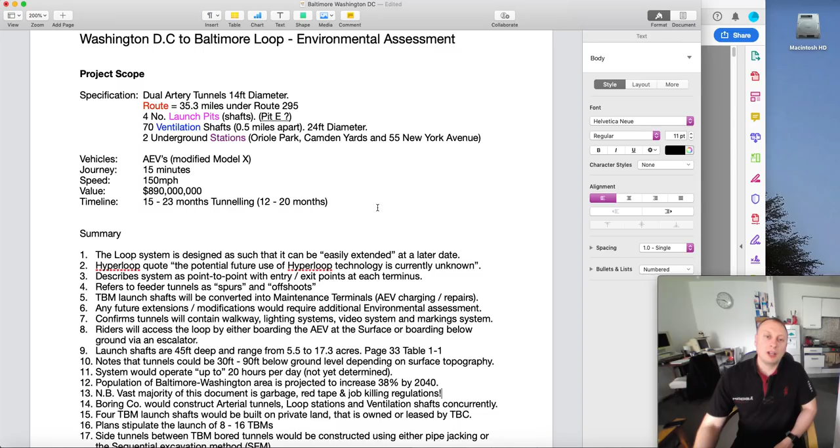They give some very, very wide timelines in terms of constructing various parts of this project. So the actual entire project, they have taken 15 to 23 months, which is near enough 50% difference between 15 months and 23. There's a wide margin there. And they say the actual tunnelling element could be anything from 12 to 20 months.

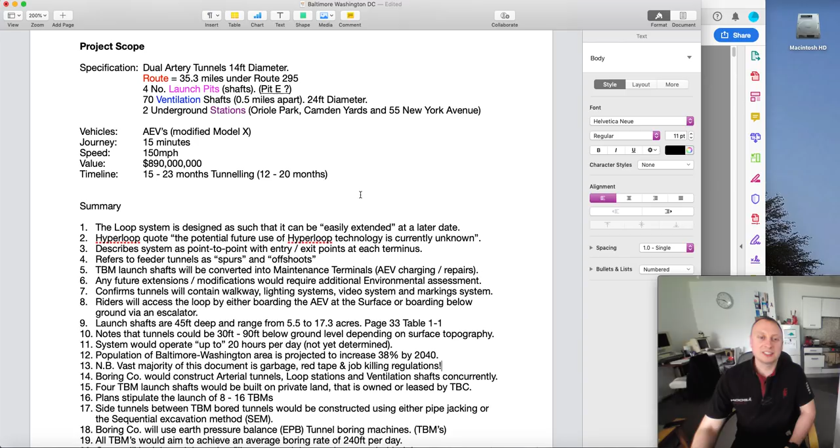They also mention using lots and lots of different TBMs, 8 to 16 TBMs. Again, there's a lot of difference there. Well, why do you need 16 TBMs? Why not 8? Anyway, let's get into the details. Like I keep saying, there's a lot of rubbish in this document. Some very, very strange kind of regulations and specific things that it asks of you. But I'm guessing that's how you guys do it in the USA.

There's even one part asking about how this might impact ethnic minorities or people of low income, and I find that a very strange thing to single out ethnic minorities like that, when really we should be looking at how it affects anyone, from people who are on low incomes to people who are multimillionaires. It shouldn't really matter. If it's going to affect you to the detriment of your health or your well-being, then that should be considered. It shouldn't really matter if you're black, Chinese, Korean, Pacific Islander, European. It shouldn't really matter at all.

Anyway, the loop system is designed such that it can be easily extended at a later date. They plan to add more stations in between Washington and Baltimore, which I will point out later on. But this actual environmental draft report does not take into consideration adding extra micro stations along the route. That will be considered in a separate report.

They talk about the Hyperloop, but it's not really anything to do with potentially converting it. They say the potential future use of Hyperloop technology is currently unknown, basically saying, well, we don't really think it's going to be used for Hyperloop, which I was quite surprised to read. They describe the system as point-to-point with entry/exit points at each terminus. There are only 2 terminuses, one in Baltimore near the main stadiums there, and one in Washington. Refers to feeder tunnels as spurs and offshoots.

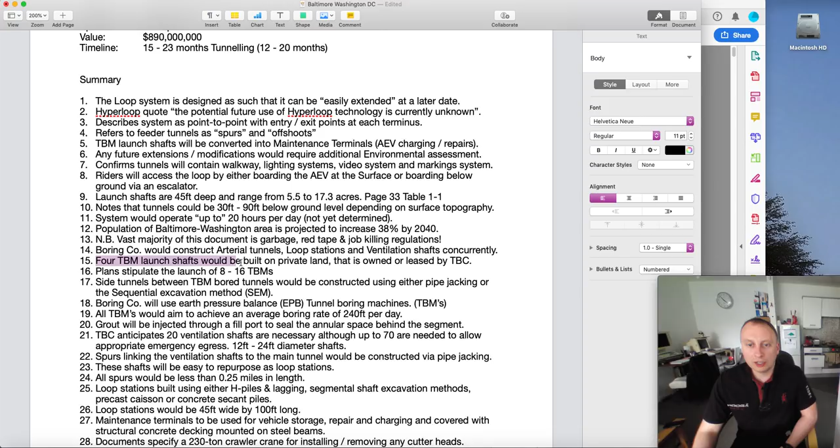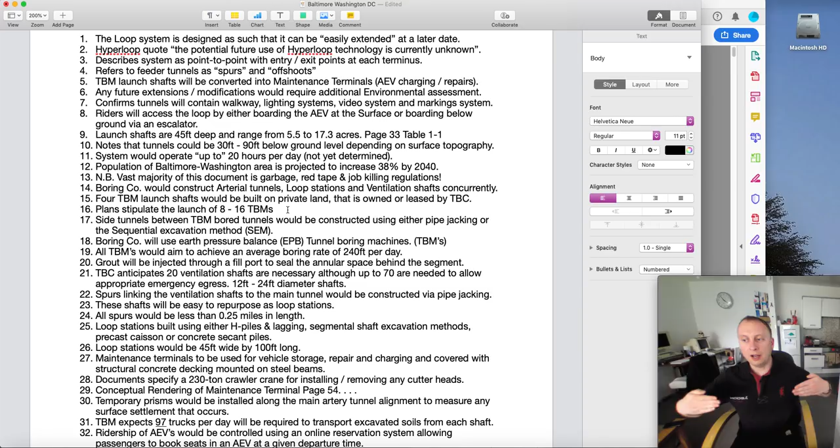4 TBM launch shafts will be built on private land that is owned or leased by the Boring Company. Plans stipulate the launch of 8 to 16 TBMs. If they did 16 TBMs, and this is quite a big issue, they would then have to extract the cutter head from the ventilation shafts, because you'd have 2 TBMs essentially working their way towards each other, and they would meet at the actual ventilation shaft, at which point both cutter heads would be removed and the machines would be taken apart and disassembled. So I'm unsure about that, but it might be better just to do a TBM from one launch pit to another launch pit, and then it's a lot less work trying to extract that cutter head.

Side tunnels between TBM bored tunnels will be constructed either using pipe jacking or sequential excavation method. Sequential excavation method, from what I've read about it and basically my experience, is going to take a lot longer. To build side tunnels, it might be easier to use pipe jacking, and as you know, I do like pipe jacking. Boring Co will use earth pressure balanced tunnel boring machines, which we kind of thought all along, but it kind of just confirms it there.

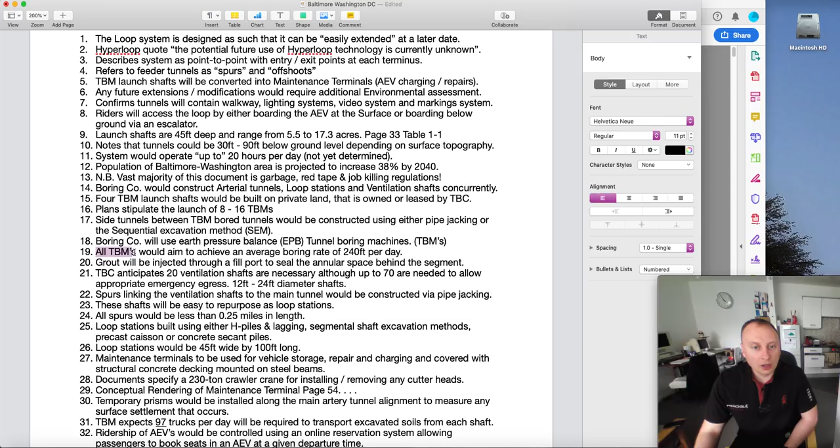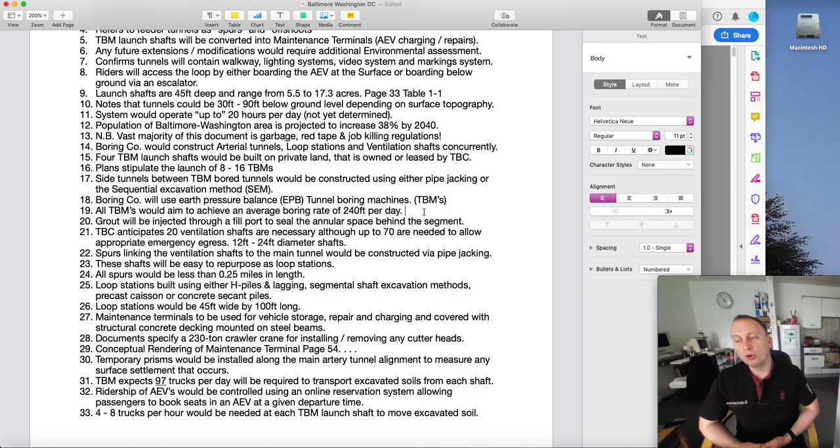All TBMs would aim to achieve an average boring rate, and this is one of the revelations of this document, of 240 foot per day, which is exactly 10 foot per hour if they're operating 24 hours a day, although it might be that they do 24 foot in this hour and then they have an hour where they're basically loading up the machine and removing the spoil. So it will average 240 foot per day, which is not bad going, really, not bad at all. And that's probably an underestimate of what they actually think they can achieve. I think they're kind of sandbagging that number. I think it'll be nearer to 300, maybe even 350.

Grout will be injected through a fill port to seal the annular space behind the segment, and obviously they're going underneath the motorway. What you want to do is seal that space so that you don't get any subsidence in the land above the tunnel.

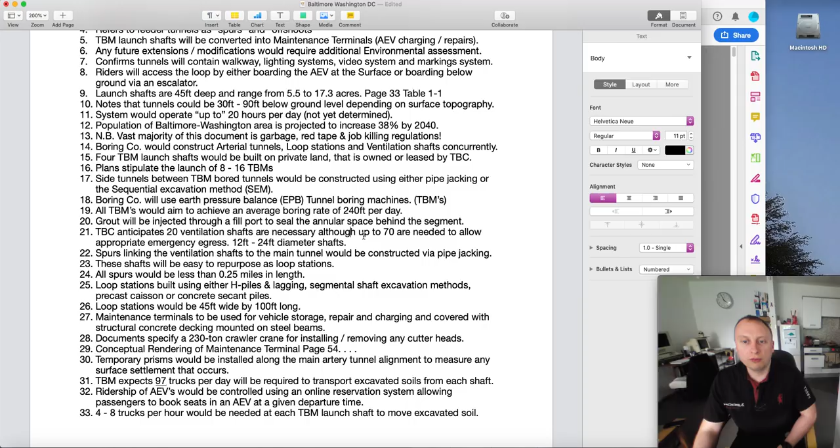The Boring Company anticipates 20 ventilation shafts are necessary, although up to 70 are needed to allow appropriate emergency egress. The actual shafts will be 12 to 24 foot in diameter. Spurs linking the ventilation shafts to the main tunnel will be constructed via pipe jacking, and obviously the sequential excavation method.

Loop stations, they actually give a firm dimension on the actual size of the loop stations, and they said it's going to be 45 foot wide by 100 foot long, and I think it was also 45 foot deep. Maintenance terminals to be used for vehicle storage, repair and charging.

So the actual TBM launch pits would be turned into these maintenance terminals. They actually build 2 separate floors, and then they'd have all the equipment and all the storage area built into that space. So maintenance terminals to be used for vehicle storage, repair and charging, and covered with a structural concrete decking mounted on top of steel beams, also known as concrete planks. We like to call them concrete planks here in the UK, but it's basically the same thing.

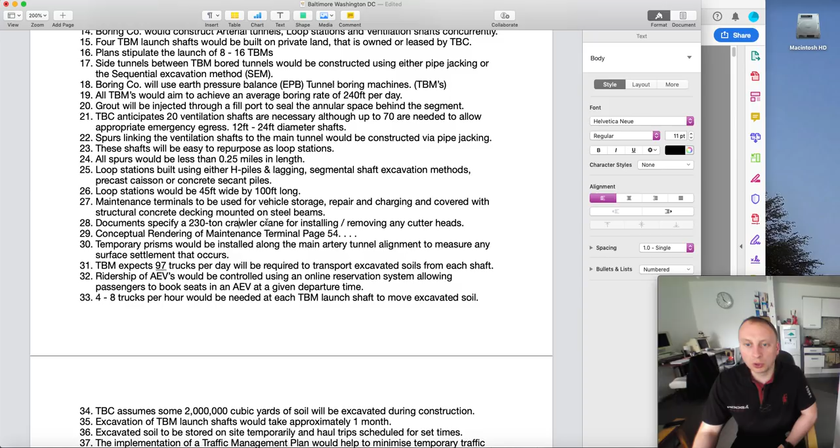Documents specify a 230 ton crawler crane for installing and removing any cutter heads, which seems reasonable. I would imagine that getting one of those might be a little bit tricky, but it's doable. There won't be that many, I'd imagine. But then again, it is the USA. There might be tons of them. I imagine the UK would be difficult to get one of that particular size.

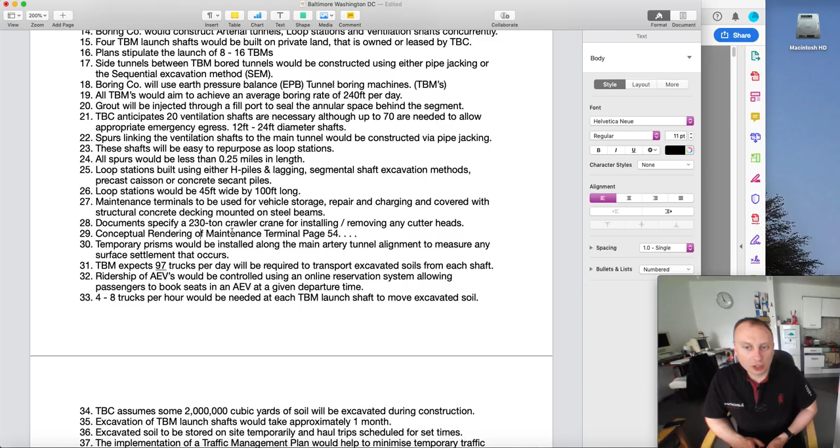Conceptual rendering of maintenance terminal is on page 54. We'll have a look at that in a minute.

Temporary prisms will be installed along the main artery tunnel alignment to measure any surface settlement that occurs. So these prisms will be mounted, say, every 10 foot or so. And then you'll have a system that is mounted on top of either a lamppost or maybe on the side of a building, and it'll be shooting out its measurements to that particular prism every 5 or 6 seconds, maybe 10 seconds, and if there's any kind of movement, even if it's a millimetre, it'll notice it and it'll be able to notify the people running the project.

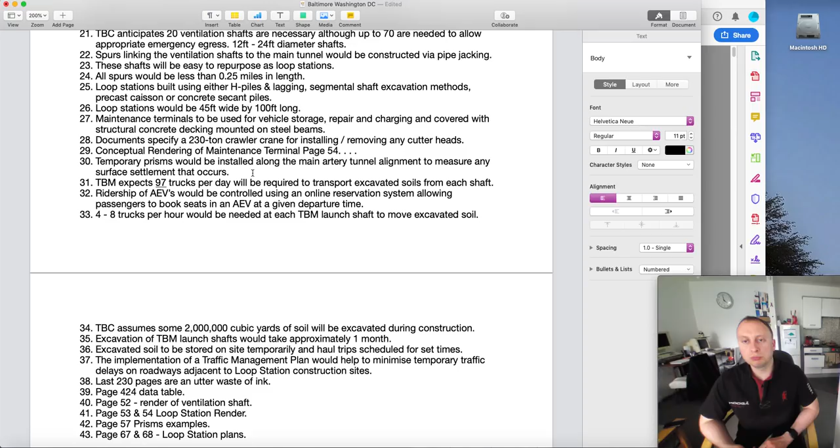If the movement is more than, say, 5 or 6 millimeters over a short period of time, say 10 minutes, it will immediately notify everyone involved in the project and instruct the TBM to stop work, which is the common sense thing to do, because obviously something has gone badly wrong. Potentially they've hit an area of land that is full of voids, or potentially has been fractured, or maybe they've hit an area where the water table is higher than in the rest of the route, and obviously they need to stop the TBM and rectify that as soon as possible.

The TBC expects, this is quite an important fact, 97 trucks per day will be required to transport excavated soil from each shaft. 97 trucks per day is a lot of trucks, so we're talking big diesel trucks. And they actually put a plan in the environmental draft report, and some of these routes are quite considerable for the actual trucks to dispose of this spoil. So the actual carbon footprint of these trucks operating every day for 12 to 24 months is going to be quite considerable.

That is potentially an issue, and they need to think about how they can minimise the carbon emissions from those trucks. Maybe use electric trucks. Maybe they could use the local railway or something to transport the spoil. It doesn't look like it on the plans, but 97 trucks is a lot of CO2. That's going to upset the people that are approving this or potentially could approve this, and they might, on that basis, have some reservations in terms of, is this going to be good for people if it's pumping CO2 into the atmosphere every day for 12 months? Well, obviously not. It's dangerous.

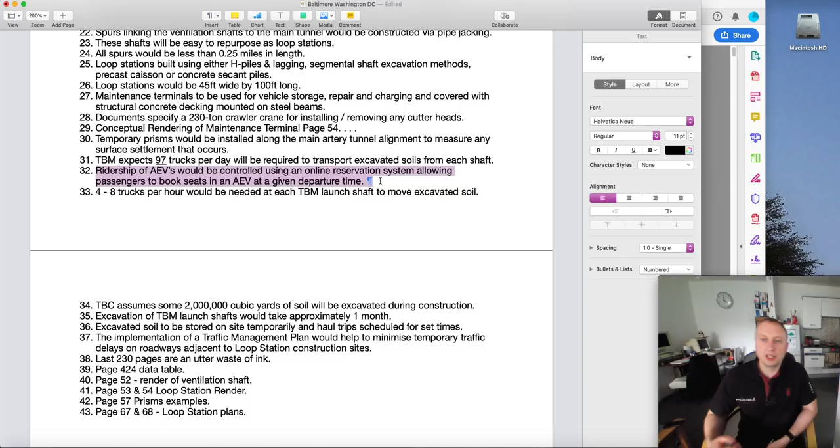Ridership of AEVs would be controlled using an online reservation system, allowing passengers to book seats in an AEV at a given departure time. So a bit like a train. You'd obviously do it via a Boring Company app. You get on there, say I want to catch an AEV at 8:10. You get to the actual loop station slightly before that, you get into the AEV, and then it takes you there, and it obviously then bills you. And the actual phone would be the ticket.

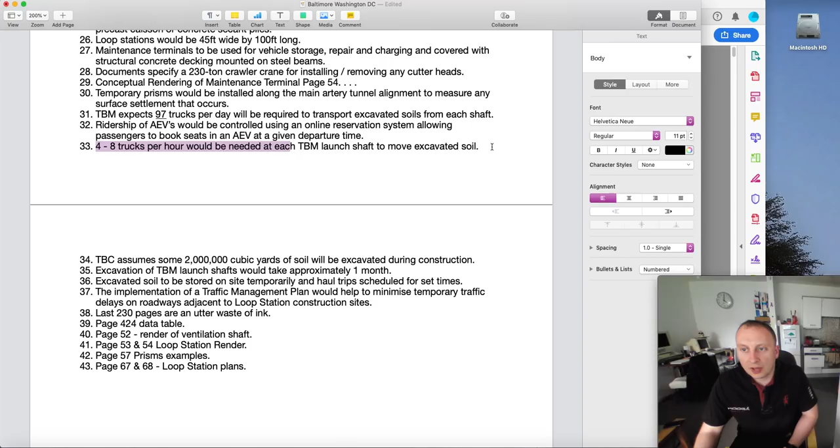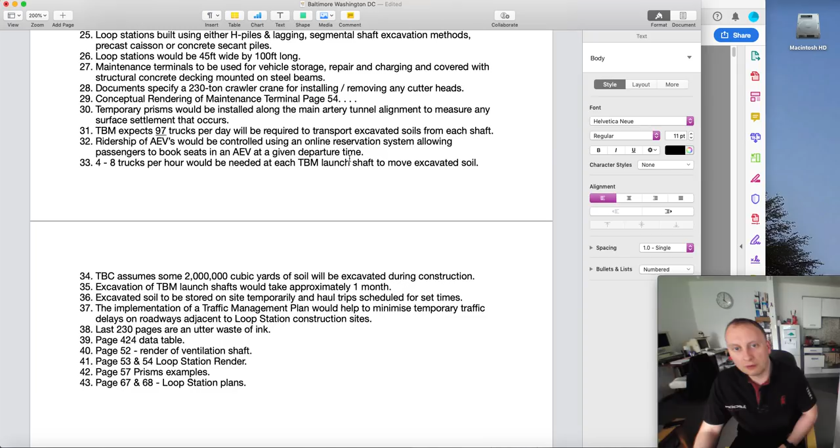So I've got here 4 to 8 trucks per hour would be needed at each TBM launch shaft to move excavated soil. That's per day, isn't it? 97 trucks per day. 4 to 8 trucks per hour. So yeah, that sounds about right. The Boring Company assumes some 2 million cubic yards of soil would be excavated during construction. That is insane amounts of spoil that is going to have to be taken somewhere.

They do mention in the document about potentially turning this into bricks, but at the moment they're just assuming that it's going to be taken to landfill. That is an immense amount of spoil. We're talking like a huge mountain full of soil. If they could turn that into bricks, obviously they can then turn that into some money, which will help them fund the project and keep costs down. That needs to be really looked at in depth about how they're going to set up that system of converting all that spoil into bricks on the same day that the spoil arrives to the actual site.

Excavation of TBM launch shafts will take approximately 1 month. Sounds about right. Might be able to get that below a month, I'd imagine. Excavated soil to be stored on site temporarily, and haul trips scheduled for set times. So I'd imagine they'd want to keep the spoil on site between, say, 7 AM and 10 AM, and then they would want to do a load of trips before 3 PM, and then 3 PM till 7:30 PM they'd want to again store it on site and try and minimise the amount of trucks that are going into rush hour traffic.

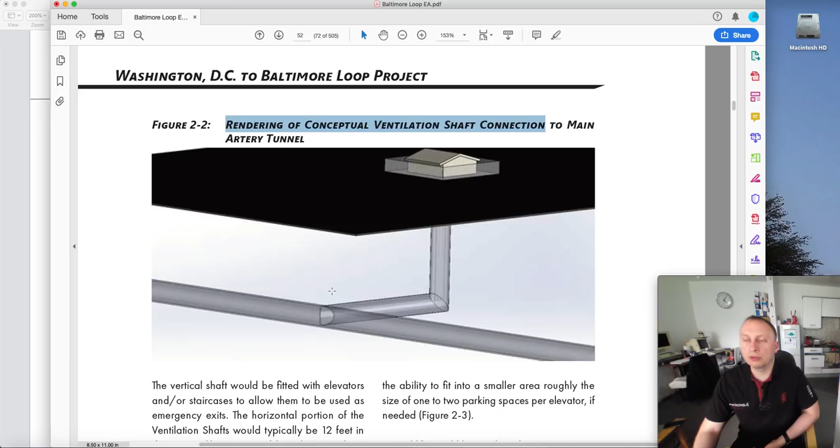So we've got our rendering of the conceptual ventilation shaft. This potentially will be built using pipe jacking. Up to 70 of these on the project. Very important that they ventilate this space correctly. Even though there's not internal combustion engines in that tube, you might still get the build-up of carbon dioxide, and there might be a shortage of oxygen, so you need to make sure that there's plenty of changes.

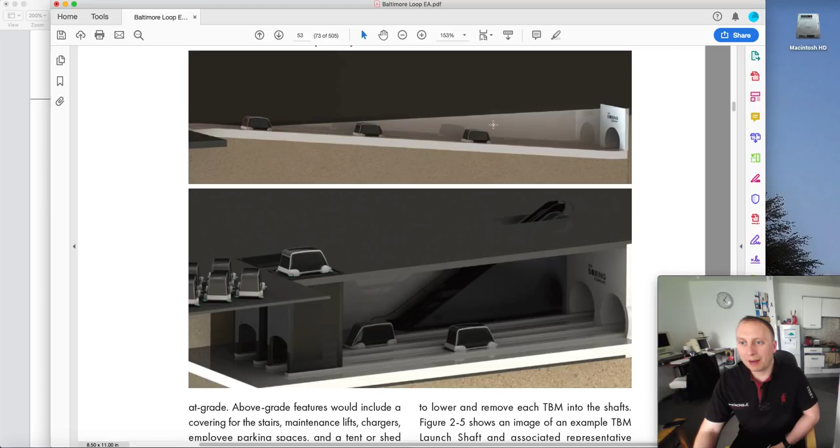Here is our loop station conceptual rendering. So we've got the option of a ramp, or the option of this, which is kind of like an underground station, really. The interesting part, I'd say, about this is they've got the vehicle stored on the surface. People come down via the escalator. I presume there's one on the other side. They don't show it, but obviously they have to do this cutaway here.

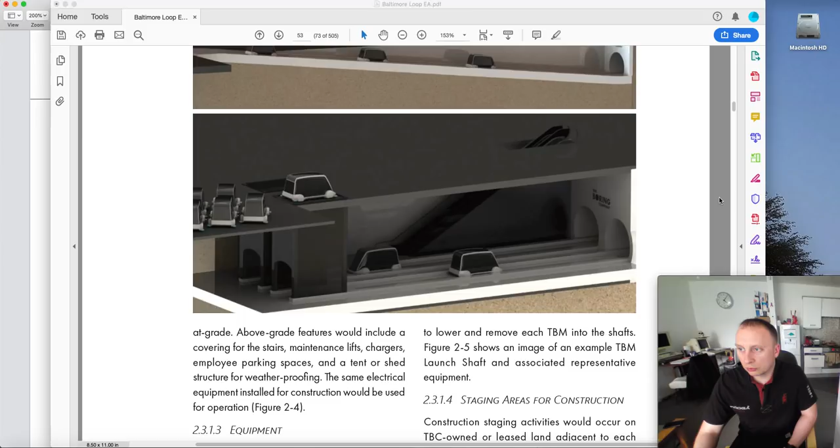So the actual TBM launch shafts, they're proposing 4. Potentially they might use 5, but it's unlikely. They have proposed this launch pit E, but it's likely there'll be 4 of these, and these will be converted into these maintenance terminals or maintenance yards.

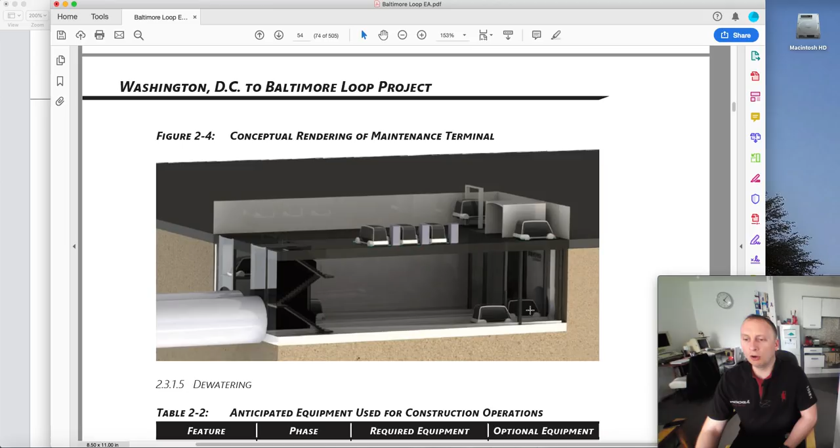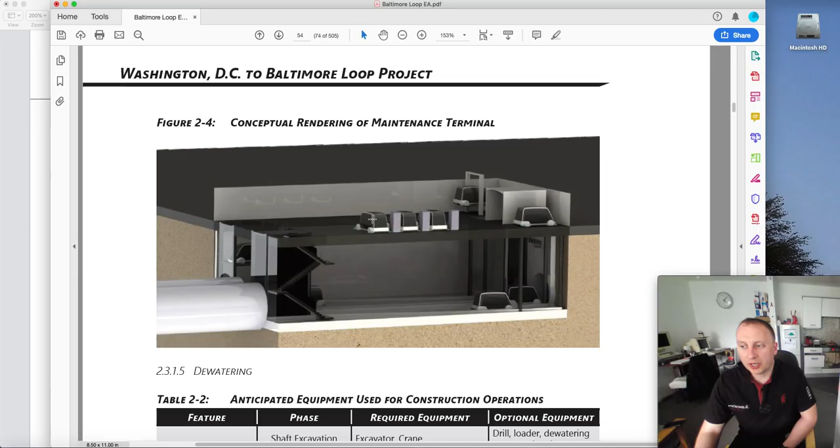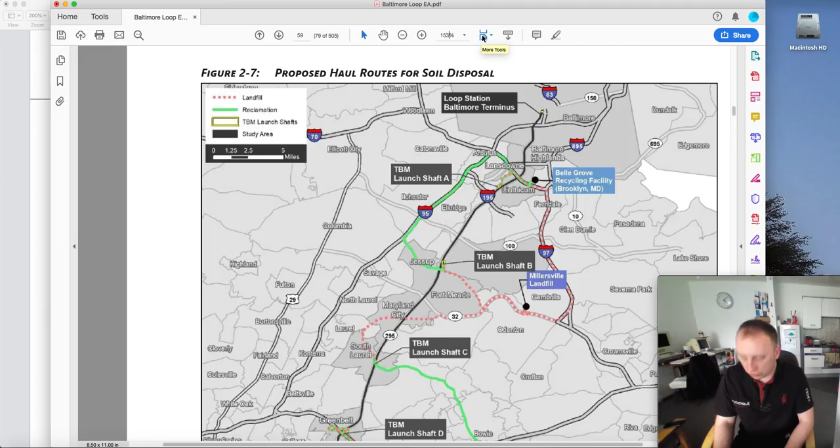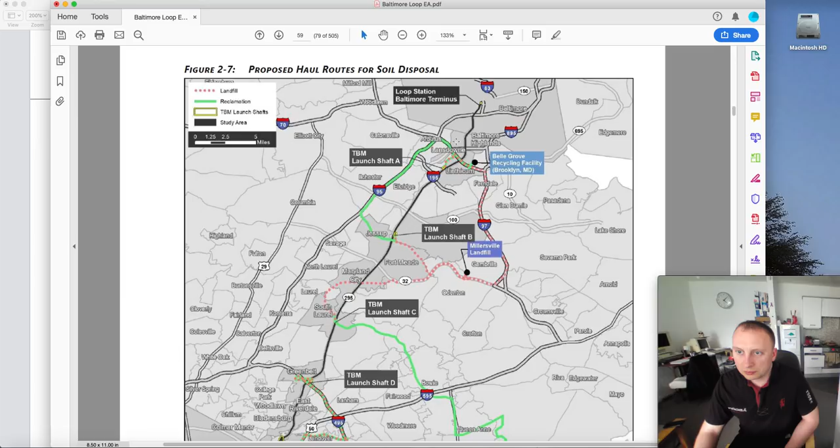What else was there? Here is, so in black here, if I just zoom out a bit, is the actual route itself. So here's Baltimore going down to Washington DC here, and these areas in green are the proposed haul routes for the actual trucks that will be needed to remove the spoil from the TBM launch pits.

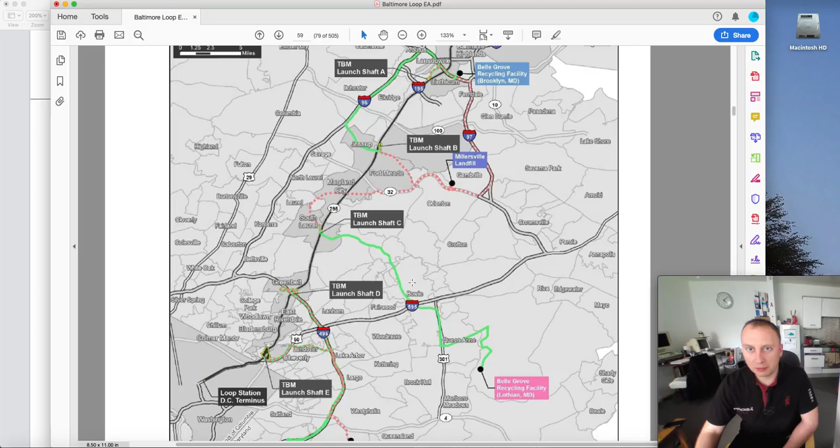As you can see, these are long routes. I mean, look at this one from launch shaft C. That's got to be nearly 18 miles, maybe a bit longer. That is a lot of diesel that's going to be burned doing that.

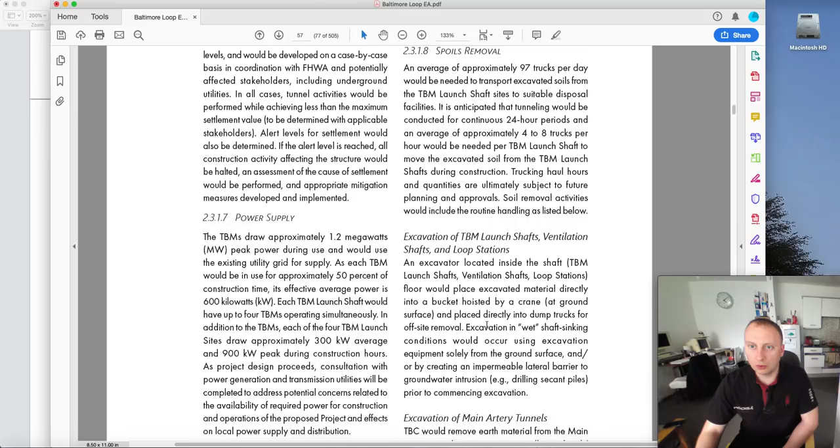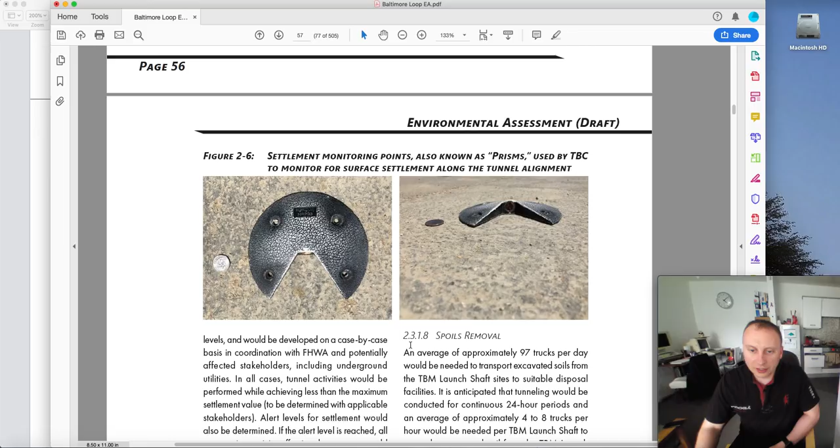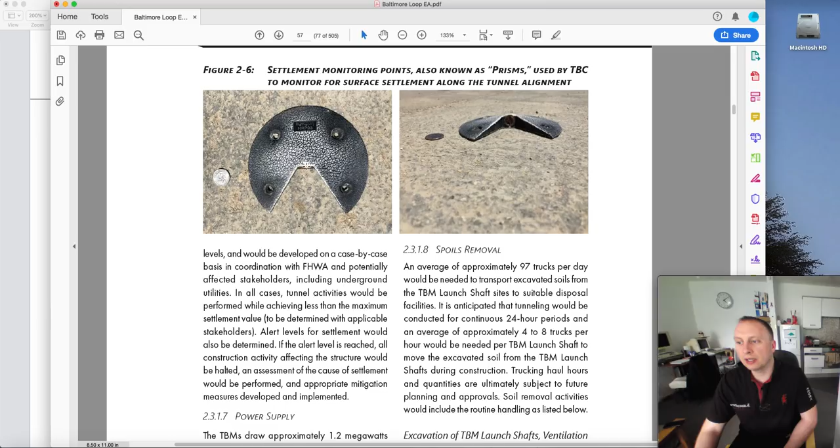57, there it is, 57, sorry, I've forgotten this. So, these are prisms. These will be mounted on the road, and they will help identify if any settlement is taking place. I can't remember if it says how often they will be placed. I'd imagine it'd be every sort of 8 to 10 foot, maybe slightly more than that. And then you'd have a pole, and on top of that you'd have your equipment that actually measures the distance between the receiver and this prism.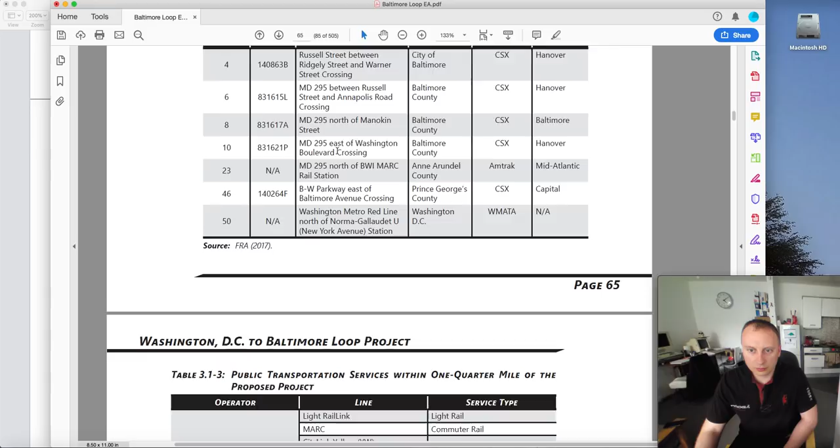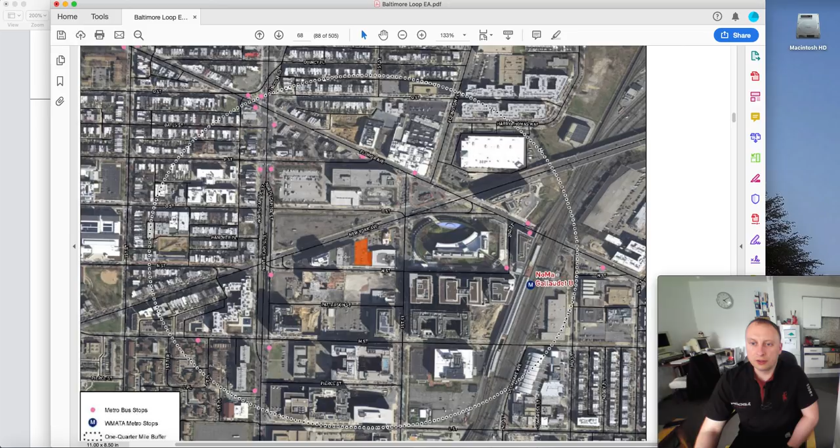And then we have our spot in Washington. Spot in Washington is a confined site, as you can see, along New York Avenue. That is going to be difficult. It's doable. It's going to be difficult. Getting trucks in and out of there is going to be an issue. Going to have issues with neighbours as well, I think, because of all the noise and all the disruption of bringing the equipment into here. But it's doable. I expect that job to cost a lot of money because of its location and the actual size of the site and what we're doing there.

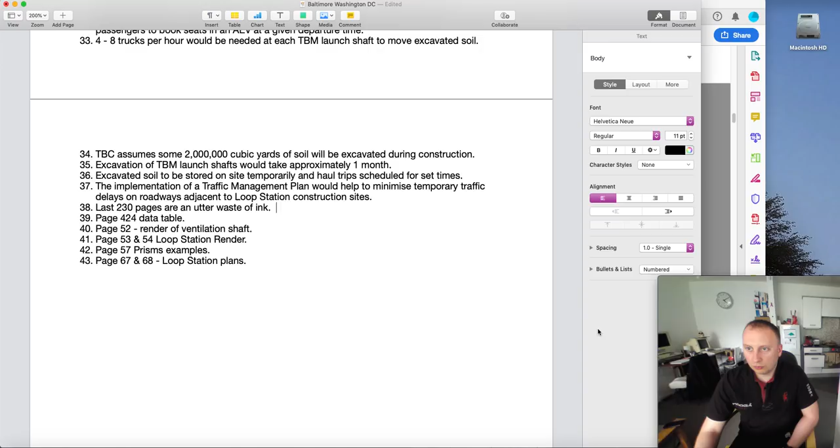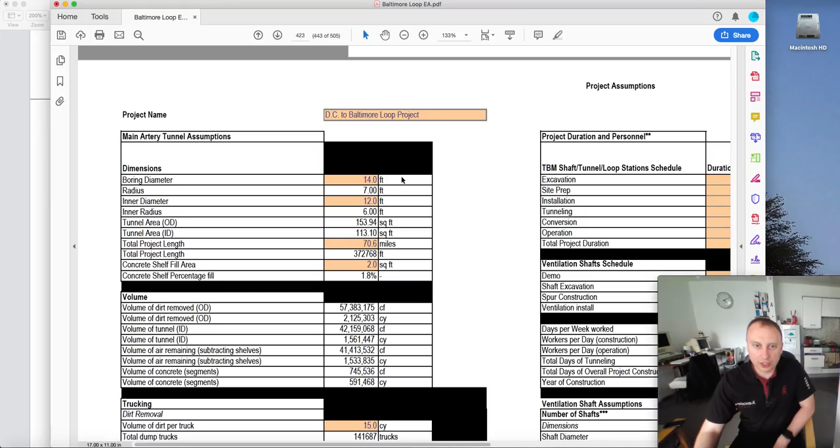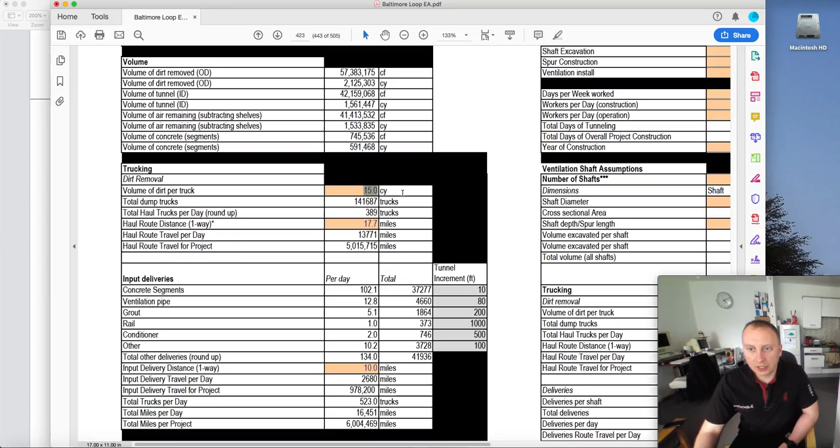Finally, 424. Go to 424. Save the best to last. It gives us some data. And I always like a bit of data. A lot of these are all project assumptions, so obviously they could be changing. Like the tunnel diameter, 14 foot, and it tells you about all the dirt that they're going to be removing, trucking. So volume of dirt that they will remove per truck is 15 cubic yards. So we use cubic meters here in the UK, but a yard and a meter is not a million miles apart.

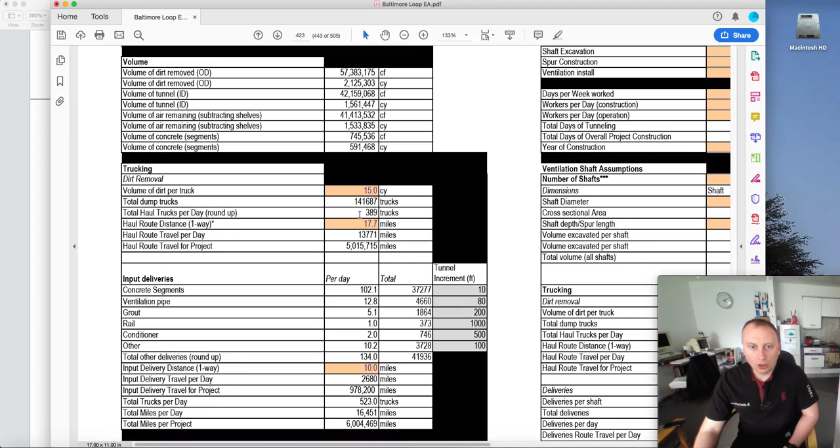Total number of dump trucks required, 141,687. Total haul trucks per day, 389. Let's have a number of ventilation shafts. Number of shafts, 70. Shaft diameter, so you've put down here potentially 2 different ones. So let's have a look at 24 foot, as that's the worst case scenario. Cross-sectional area is 452 square feet. Shaft depth 60 feet. Volume excavated per shaft is incredible, 27,143 cubic feet.

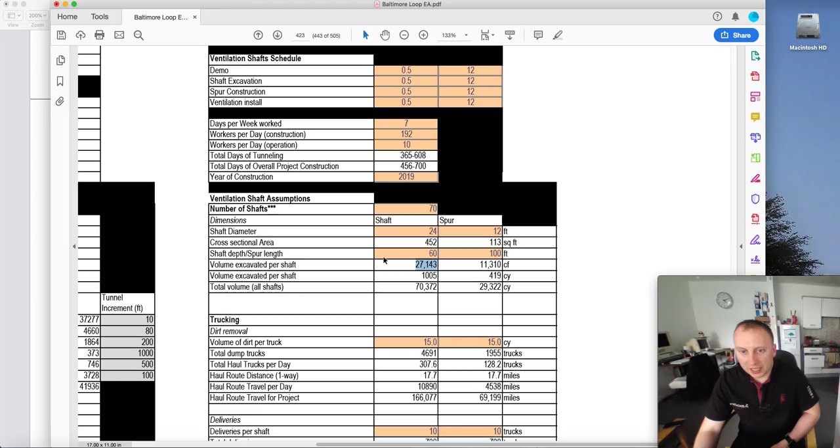So it's interesting that there's incredible amounts of spoil to be removed from these sites. It's going to be a logistical nightmare trying to ensure that you're constantly removing that from the TBM, getting it to the surface and then getting it on trucks, because inevitably what's going to be happening is you're going to be removing the spoil from the TBM. The TBM is going to be pumping it out, and then you've not got enough trucks at the surface, or you can't use the trucks because it's rush hour. So then you may have to halt the TBM for a short period of time.

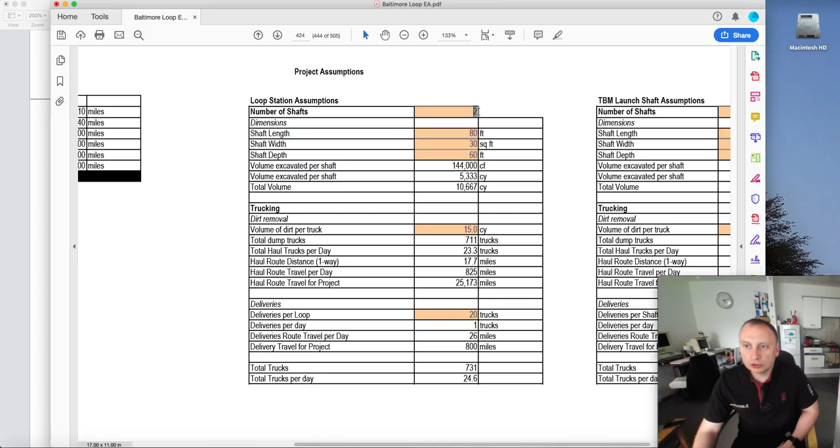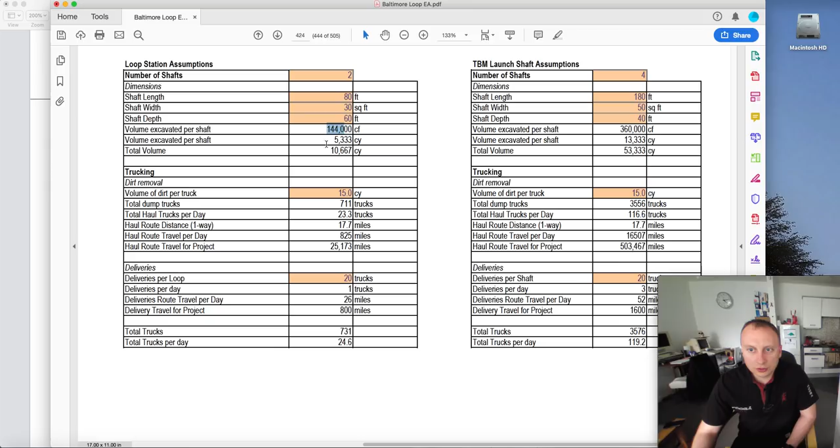Let's just look at this one before we go. So we've got TBM launch shaft and the loop stations. I thought it was 100 foot. I'm sure I read it was 100 foot. Anyway, shaft width 30 foot, shaft depth 60 foot. Volume excavated per shaft 144,000 cubic feet. Volume excavated per shaft 5,333 cubic yards. Total volume.

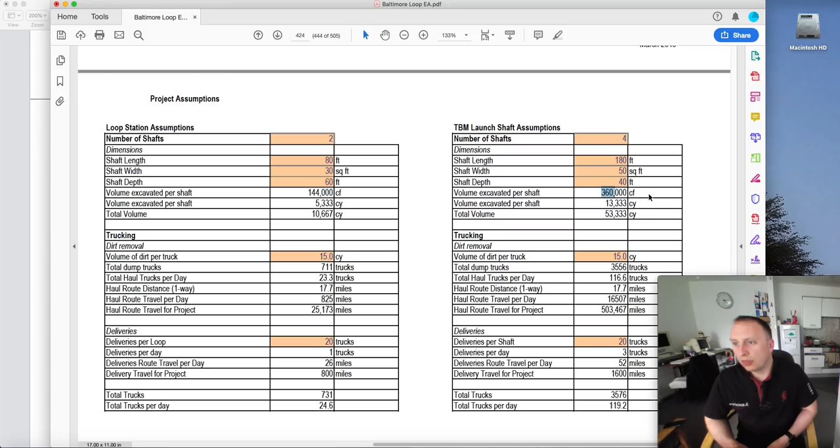Let's have a look at our TBM launch shaft. Shaft length 180 foot. Shaft width 50 foot. Shaft depth 40 foot. Volume excavated per shaft is 360,000 cubic feet, which is actually more than the loop station, interestingly enough. Volume excavated per shaft 13,000 cubic yards. Total volume 53,000 cubic yards. So again, quite a lot.

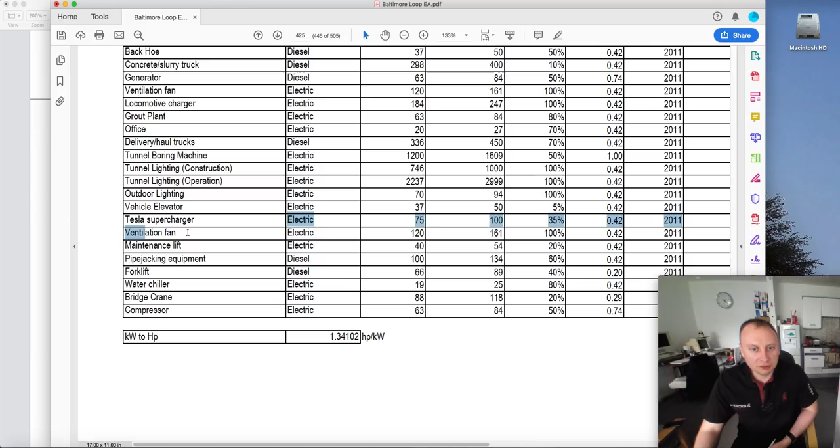And it tells you about all the equipment they're going to be using on the site as well. A Tesla supercharger, I just noticed that there. Ventilation fan, that'll be for the ventilation shafts. Anyway, so that is that, guys. A lot of interesting information in that particular document.

If I was going to summarize this in a quick paragraph, I'd say very bullish on this project. I think it's going to happen now. I must admit, I got it wrong. I kind of doubted this project was going to happen. I kind of doubted it was going to go through the planning process. I thought it was maybe going to be stopped before it even went through planning, but it appears it is doing. I believe they've got the answers for all these problems that are outlined in this environmental assessment. They can be easily fixed.

Maybe even the trucking could be converted to electric or some other form of fuel like natural gas potentially, which produces less emissions. We don't like diesel trucks. They're not good for the environment. This is a big job. It's around 36 miles. A lot of tunnelling to be completed. We've got 4 launch pits, we've got 2 stations, we've got 70 ventilation shafts. That is some serious work. It could end up costing $1 billion, maybe slightly more. This is a big job.

However, the potential for this to change the landscape in Washington DC and Baltimore is immense. To begin with, it'll only allow, I don't know if it's 1,000 people or 1,000 vehicles per day. I'm going to have to look into that, guys. I think it's 1,000 vehicles per day. 1,000 vehicle journeys per day. However, it can be extended up to 100,000 vehicle journeys per day, and that's what it says in this document, if they add micro stations along the route. I think that they will apply for that once this project is either near completion or it has been completed.